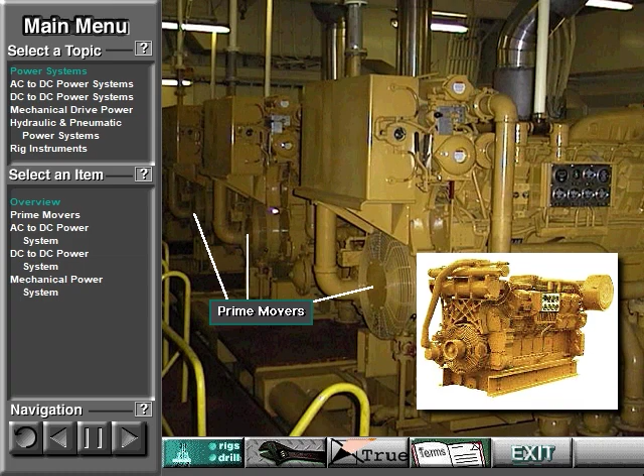At the heart of every rig power system, whether electrical or mechanical, is the prime mover. A prime mover is the rig's main source of power. Most rigs have more than one prime mover, and they are almost always large internal combustion engines. Some equipment on the rig requires hydraulic and pneumatic power, and the rig's hydraulic and pneumatic systems also obtain their power from one of the three basic distribution systems.

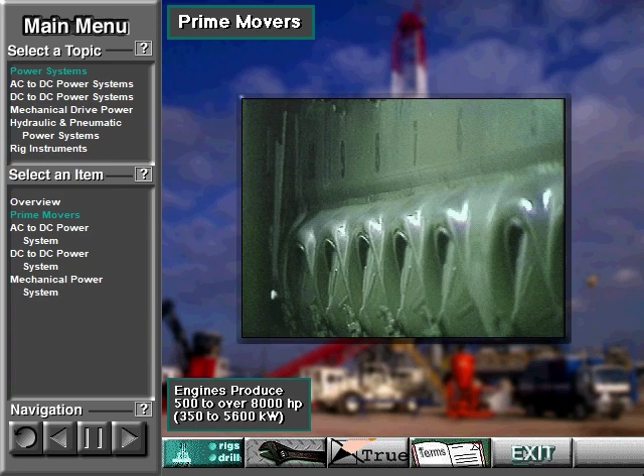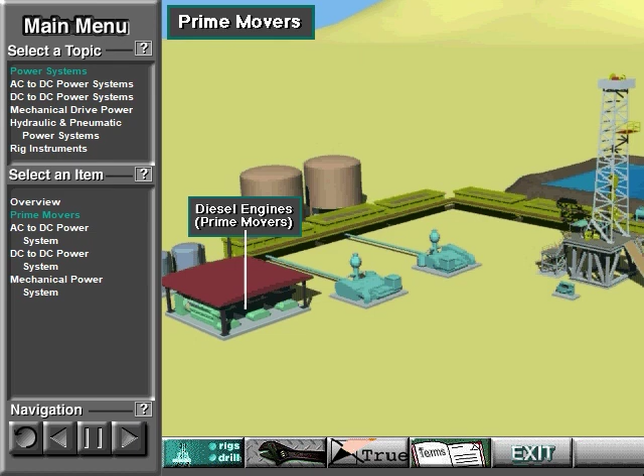Large diesel engines are the main power source, the prime movers for most rigs. These engines often produce from 500 to over 8,000 horsepower, or 350 to 5,600 kilowatts. Rig builders usually house several engines together to drive the rig equipment, and they also keep extra engine sets available for backup operations.

Most rig engines are diesel because, unlike gasoline engines, they can produce a lot of power when running slow. Also, diesel fuel is not as volatile as gasoline, so it's safer to use, transport, and store.

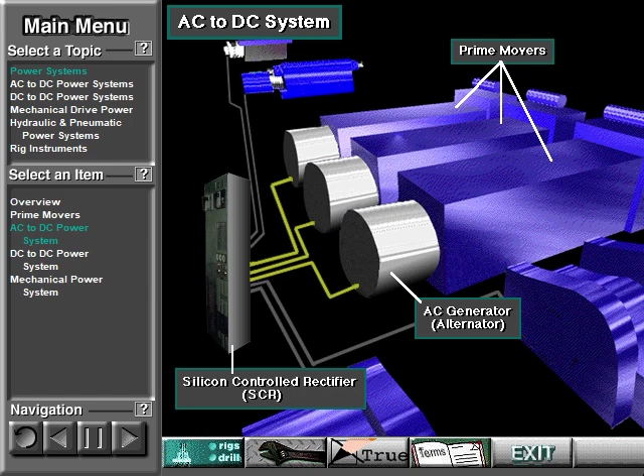Here's an AC to DC power system. The prime mover, usually a diesel engine, supplies power to the AC generator, also called an alternator. From the AC generator, AC current is sent to the SCR, the silicon-controlled rectifier. An SCR is a high-tech solid-state electronic device.

The SCR converts AC to DC current, which drives the heavy rig equipment, such as the mud pumps, the drawworks, and the rotary system. Auxiliary loads, such as small pumps and rig lighting, need lower voltage AC power, so a transformer steps down or reduces the voltage to the rig's auxiliary electric equipment.

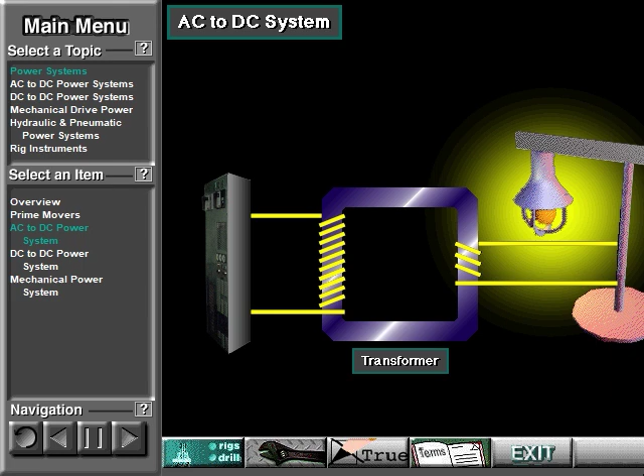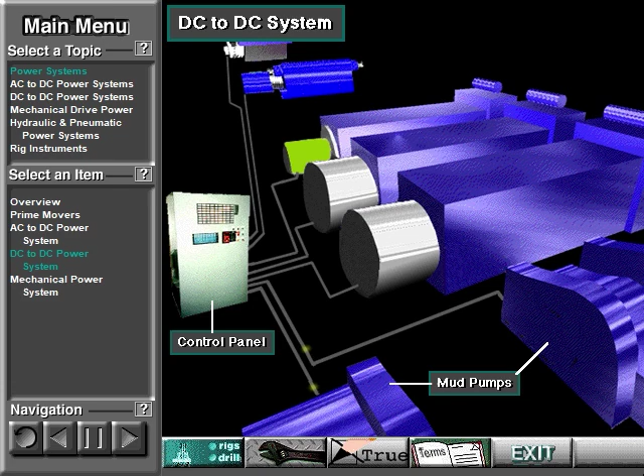Here's a DC to DC power system. The prime movers, usually diesel engines, power DC generators. From the generator, DC current goes through a control panel directly to DC motors. The DC motors power the mud pumps, the drawworks, and the rotary system.

A smaller AC generator is also part of the system. It supplies AC current for equipment that works best with this current type. For example, a chemical mixing pump requires AC power.

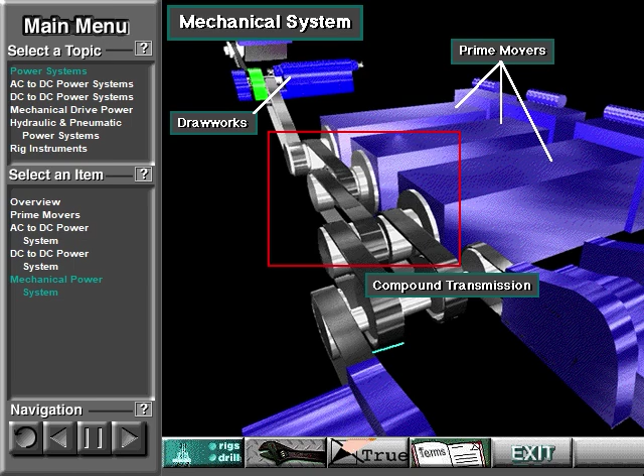Here's a mechanical rig system. Mechanically powered rigs are usually smaller than those rigs which use electric power. The prime mover drives a mechanical compound transmission, which in turn powers the drawworks, the rotary table, and the mud pumps.

Auxiliary loads, such as small motors, are supplied with AC from an alternator connected to the prime mover.

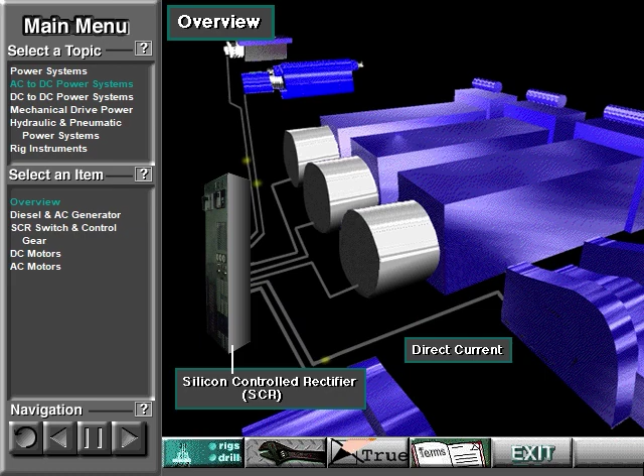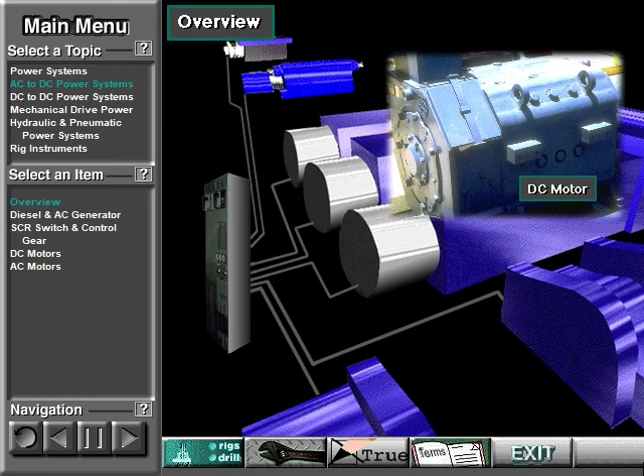Alternating current put out by the AC generators goes through heavy-duty electric cables to a special device called a silicon-controlled rectifier, or SCR. The SCR converts AC to DC. Other heavy-duty electric cables carry DC electricity to the DC motors. The DC motors convert electrical energy back into mechanical energy to drive the powerful hoisting, rotating, and circulating equipment.

Rig owners like to use AC generators because they can be built to be very powerful for their size, which is an advantage over DC generators. Also, rig equipment can distribute AC easier than DC. But direct current has certain advantages when driving large equipment. Mainly, DC motors produce a lot of torque at low speed that the drillers can easily control.

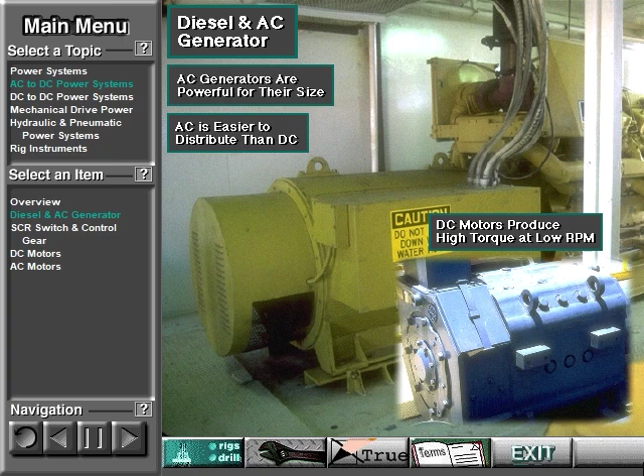Using remote switches on his console to control the SCR control panel, the driller can select and deliver the power from the various generators wherever it is required. But some AC generators power big motors. In fact, most of today's diesel-electric rigs use AC generators in a system called an SCR power system.

Here, a large AC generator, an alternator, is connected to the diesel engine prime mover. As the engine mechanically drives the AC generator, the generator produces alternating current, or AC electricity. AC is like the electricity used in most cities and homes.

Equipment in this electrical cabinet converts, or rectifies is the electrical term, most of the AC current produced by the AC generators into direct current. As mentioned before, rig owners usually prefer DC current for driving the very large equipment that requires precise variable speed control and high torque.

The control equipment includes solid-state electrical components called silicon-controlled rectifiers, or SCRs. Heavy-duty electrical cables come out of the cabinet and carry DC electricity to the powerful motors driving the circulating, hoisting, and rotating equipment.

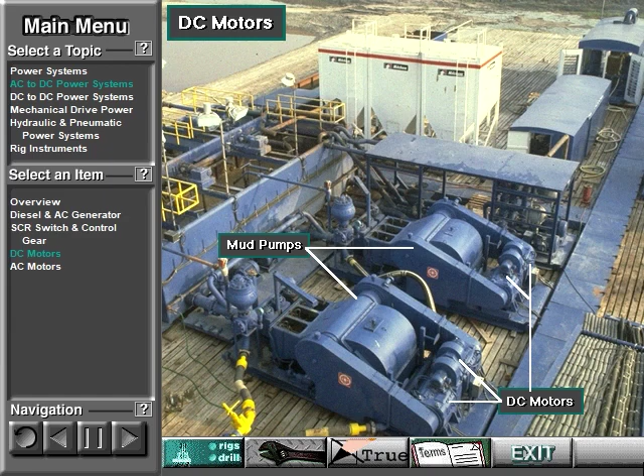Usually, large DC motors supply power to the mud pumps, the drawworks, and the rotary table or top drive. Sometimes, the drawworks mechanically drives the rotary table, but on some rigs, the rotary table has its own motor.

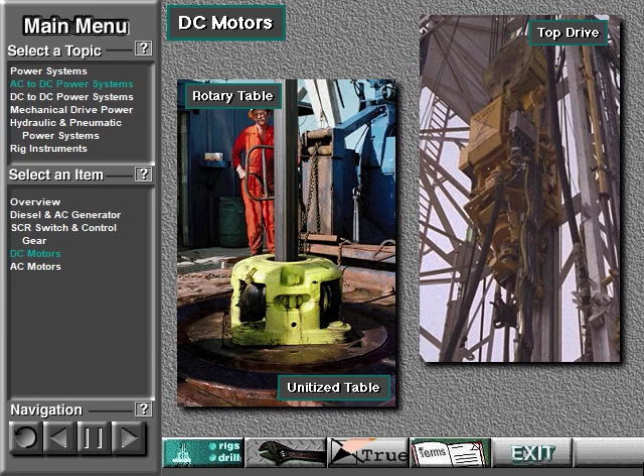The driller can control the speed of a DC motor very accurately, which is why rig owners use DC instead of AC motors. With accurate speed control, the driller can accurately set the speed the drawworks lifts, the mud pump operates, and the rotary table turns on rigs without a top drive.

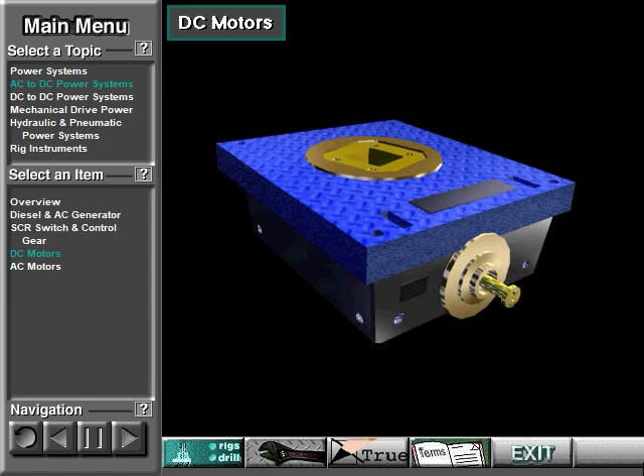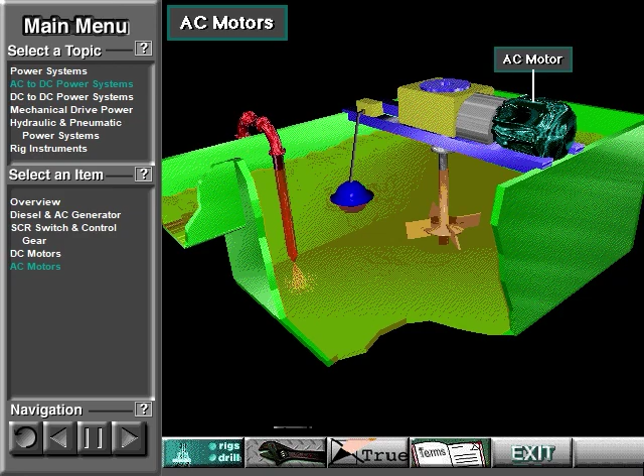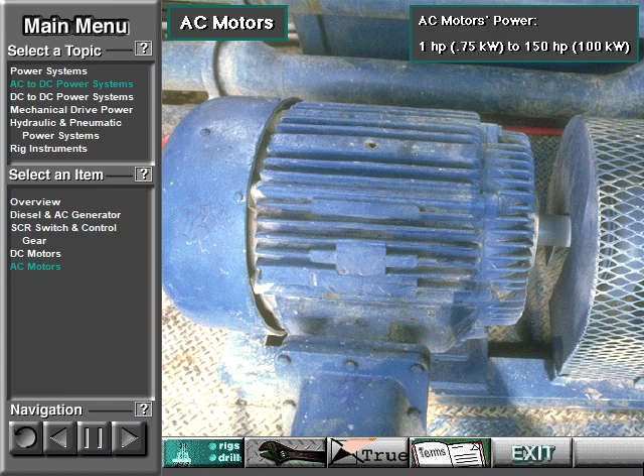Here's another AC motor. It powers the paddles on the mud agitator in a mixing tank. AC motors generally power equipment that does not require a lot of horsepower, so they vary in power from less than 1 horsepower, or 0.75 kilowatts, to more than 150 horsepower, 100 kilowatts.

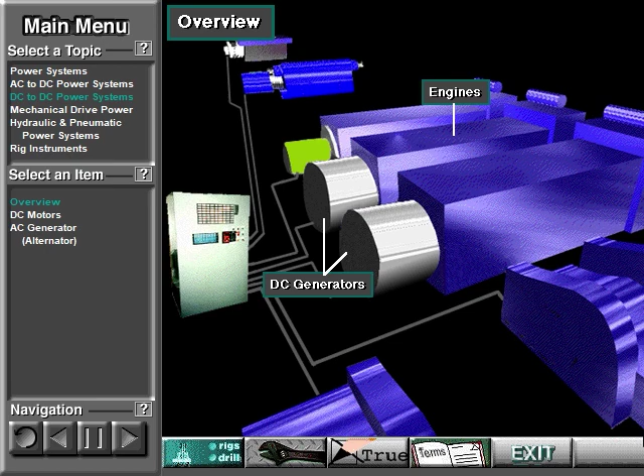For electric power distribution, some rigs use DC to DC power. DC to DC was the first electric power system. In a DC to DC system, each engine drives a DC generator, which converts the rotating mechanical energy of the diesel engine into DC electricity.

Heavy-duty electrical cables carry DC electricity via the control panel to large 1,000 horsepower or 700 kilowatt DC motors. The motors convert the electricity back into mechanical energy, which powers the hoisting, rotating, and circulating equipment.

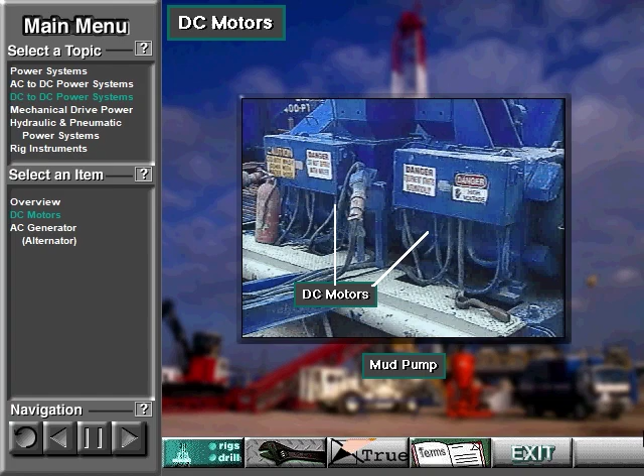For large equipment, most rig owners prefer DC motors over AC motors. DC motors put out high torque, twisting force, at low speed. Further, the driller can easily control the torque from his console on the rig floor. Keep in mind, though, that recent technological advances are allowing computerized controls and variable speed AC motor drives to be used where only DC motors were used in the past.

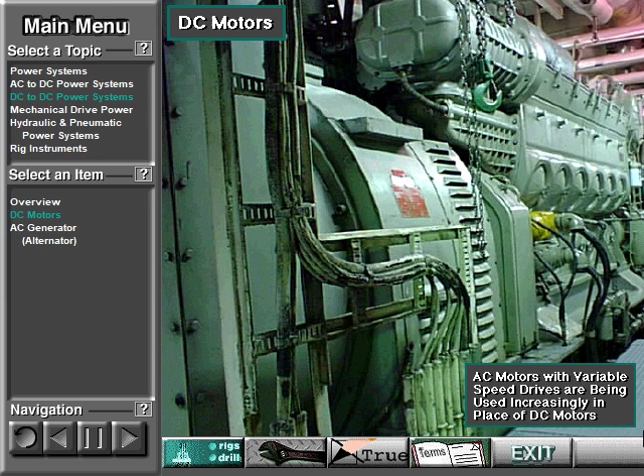This is a generator, or alternator, on a DC to DC rig. It generates the AC electricity that DC to DC rigs need. The alternator powers smaller equipment on the DC to DC rig, like the small AC motors on centrifugal pumps, air conditioners, lights, fans, water maker units, and other small equipment.

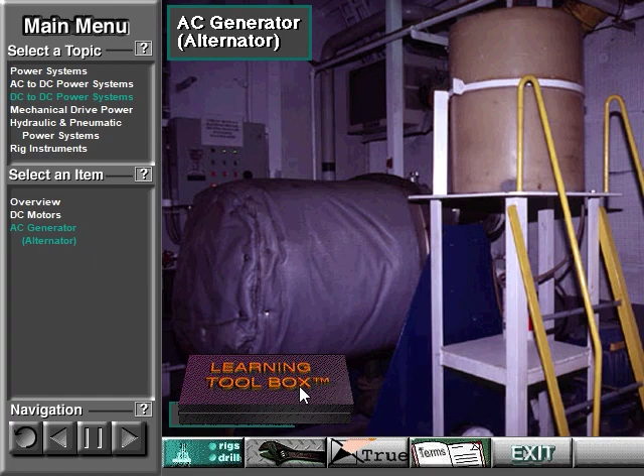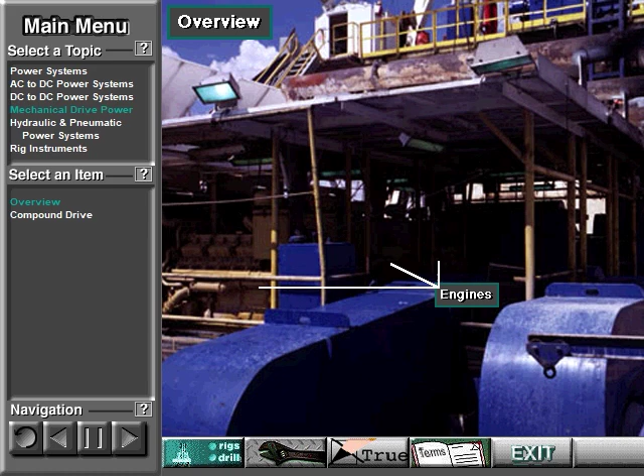Mechanical drive rigs normally compound, or connect, two or more engines to drive the main pumping, rotating, and hoisting equipment. Generally, small to medium-sized land rigs use mechanical drives.

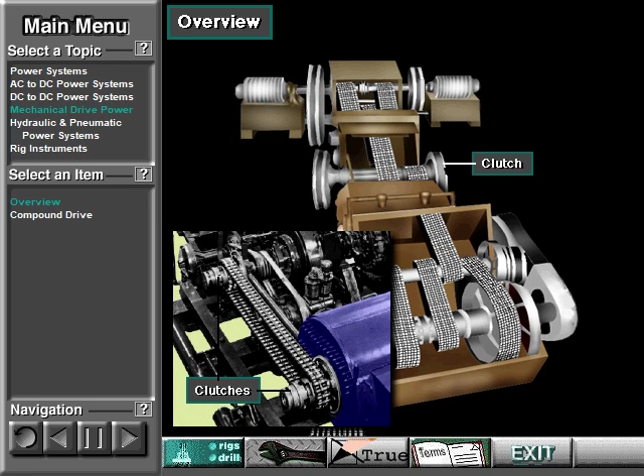They use clutches, converters, chains, shafts, belts, or compounding transmissions to connect the prime movers to the driven equipment.

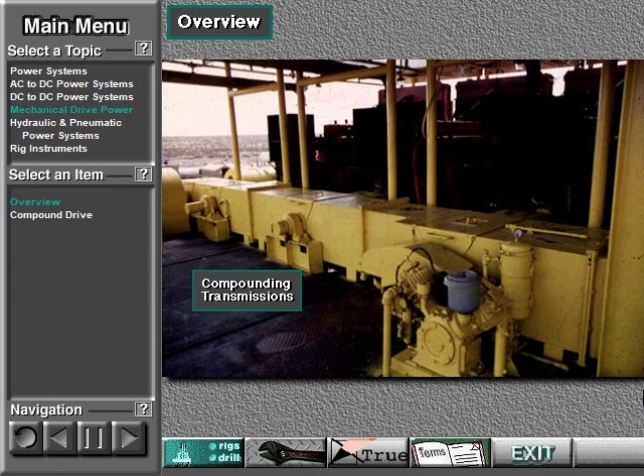Here's a common way to get power to the components on a mechanical drive rig. This shows 3 engines that the rig owner compounded. That is, the power from each engine goes through a series of sprockets and chains in a housing, called a compound.

The compound transfers engine power to the drawworks, the rotary table, and the mud pumps.

You've probably noticed that the engines and motors are commonly rated according to the amount of power they produce, in horsepower or kilowatts. Power is the amount of work performed over a period of time.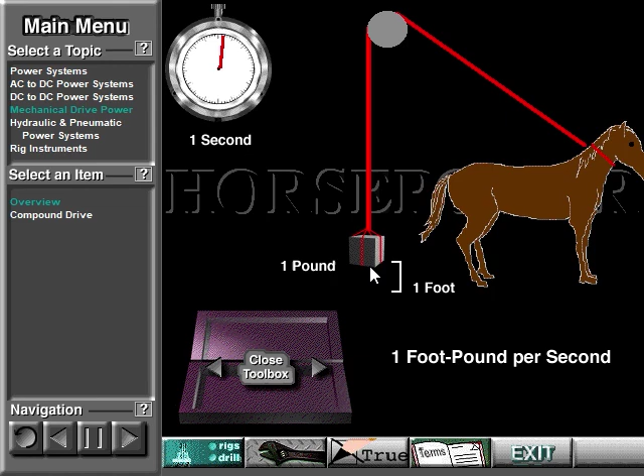One horsepower is equal to 550 foot-pounds per second. So 1 horsepower is the amount of power that would lift 550 pounds, 1 foot off the ground, in 1 second. Click on the weight.

In the metric system of measurements, power is often measured in joules per second. A joule is equivalent to 1 Newton meter. 1 joule per second is the amount of power that would lift a 0.102 kilogram object 1 meter off the ground in 1 second. Click on the weight with your mouse to lift it.

One horsepower is equal to 746 joules per second. So 1 horsepower is the amount of power that would lift a 76.1 kilogram object 1 meter off the ground in 1 second. Click on the weight.

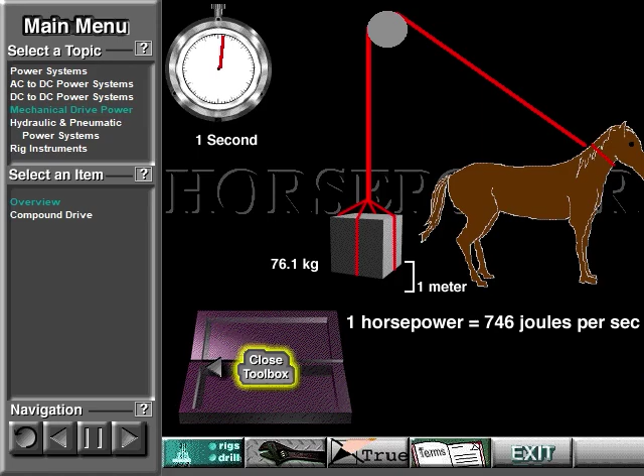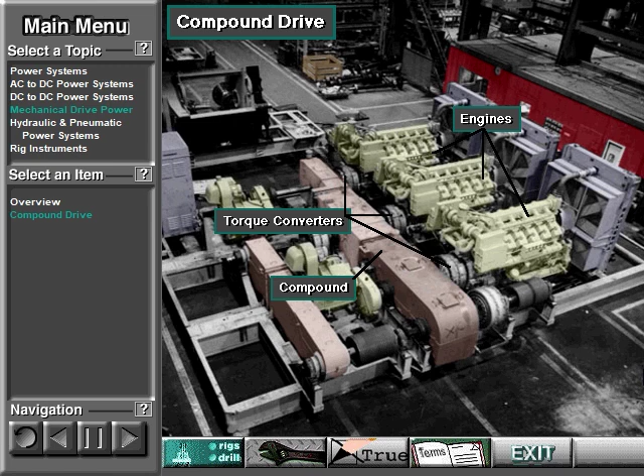In a compound drive, engine power usually goes through torque converters to the sprockets and chains. Steel guards cover the sprockets and chains, removed here so you can see them. Torque converters smoothly transfer engine power to the compound.

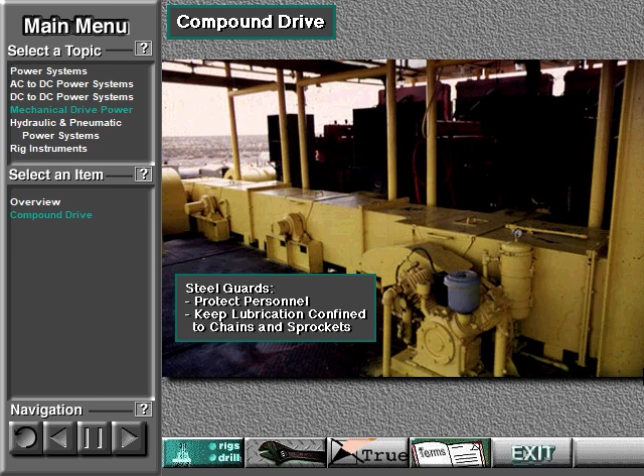Here, you can see the steel guards covering the machinery in the compound. Not only do the guards protect personnel, they also keep a lubricating oil spray confined to the chains and sprockets. Also, note that large V-belts, called power bands, drive the mud pumps. Steel shrouds also guard them.

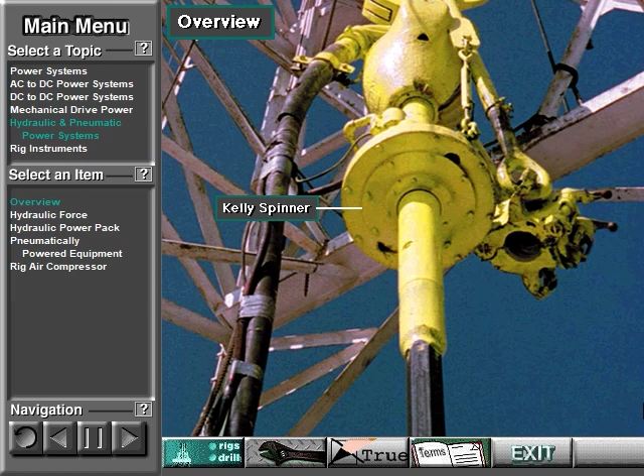Many tools use hydraulics to transmit power. Examples include the Kelly spinner, the iron roughneck, and casing tongs.

Hydraulics is a means of transmitting power by pushing on a confined liquid. Here's a piston moving inside a cylinder. Hydraulic fluid fills the cylinder to the left of the piston. The piston's surface area is 10 square inches. If a pump puts 1,000 pounds per square inch, or psi, of hydraulic fluid pressure on one side of the piston, this 1,000 psi acts on the 10 square inch piston to produce 10,000 pounds of force. That's a lot of force available for powering certain tools and equipment.

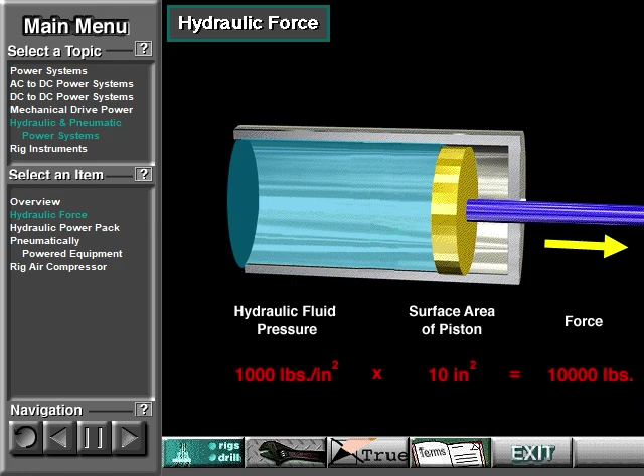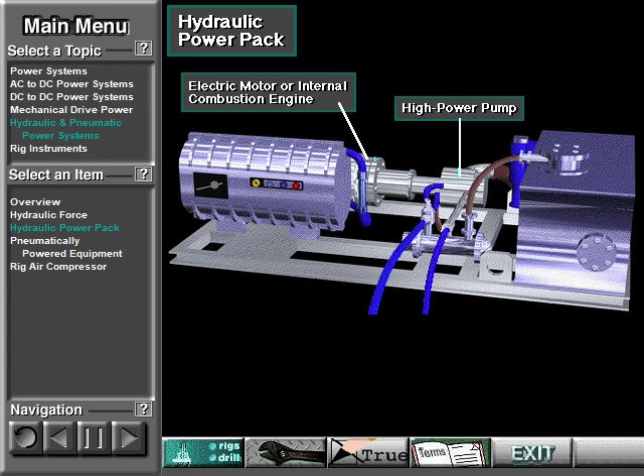Here's a typical hydraulic power pack used on many rigs. It has an electrical motor or an internal combustion engine to power the high-power pump.

The pump takes hydraulic fluid from the reservoir and sends it out a high-strength steel-reinforced hose to the devices needing hydraulic power. The fluid returns to the reservoir after it passes through the Kelly spinner or other tool. The hydraulic power pack is a closed system; the fluid is used over and over.

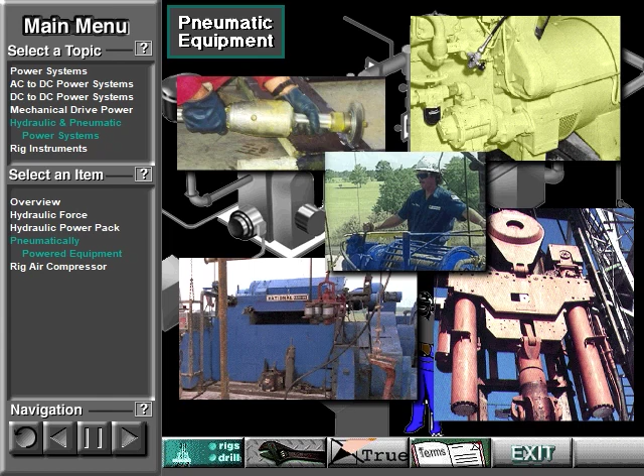Certain controls, valves, and tools on the rig are air or pneumatically operated. For instance, the driller uses pneumatic controls on the driller's console to engage and disengage clutches on equipment like the drawworks. The rig crew may use air-powered hand tools, like a grinder. They also use an air hoist, an air-powered winch, to hoist and move relatively light equipment onto and around the rig floor.

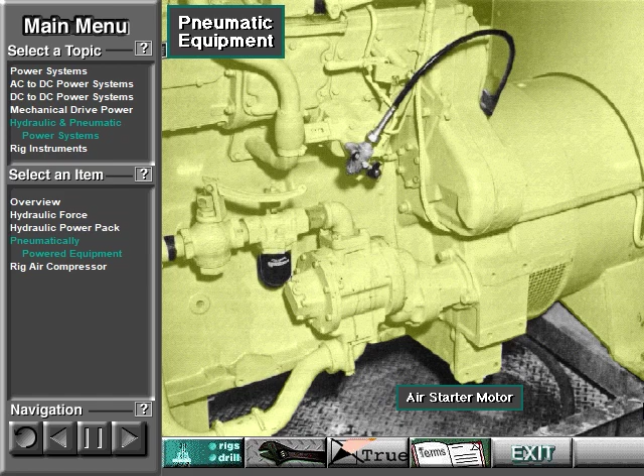Many diesel engines on rigs have an air starter, which is an air-operated motor that turns the engine crankshaft over to start it. Finally, a floating rig's motion compensator operates on large amounts of compressed air to compensate for vessel heave while keeping the drill string in position.

Which of the rig types use a motion compensator? Select the correct answer or answers and then press Accept.

Good try, but the correct answer is semi-submersible and drill ship.

An air compression system provides air pressure to operate the pneumatic controls, valves, and tools on the rig. Rigs use rotary screw compressors or reciprocating compressors to compress air. A typical reciprocating air compressor has 2, 3, or 4 pistons moving inside cylinders.

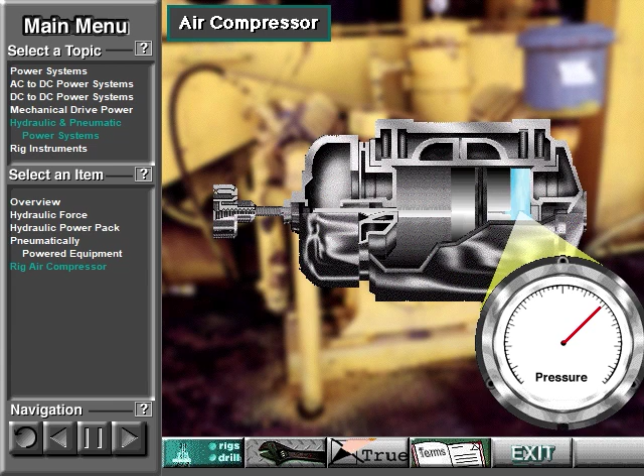The compressor takes in air from the atmosphere and raises its pressure, that is, compresses it. The volume tank stores a given amount or volume of compressed air that is ready for use when needed.

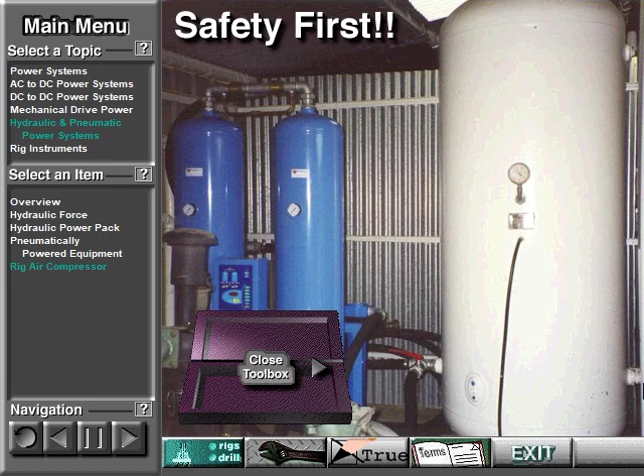Air compressed to 100 pounds per square inch, or 690 kilopascals, can be dangerous. Care must be taken when working on or around air systems. Always wear proper safety equipment such as a hard hat, eye and ear protection, work clothes, and work boots. Never attempt to open a component of an air system or a section of pipe without making sure that all of the air has been bled out first.

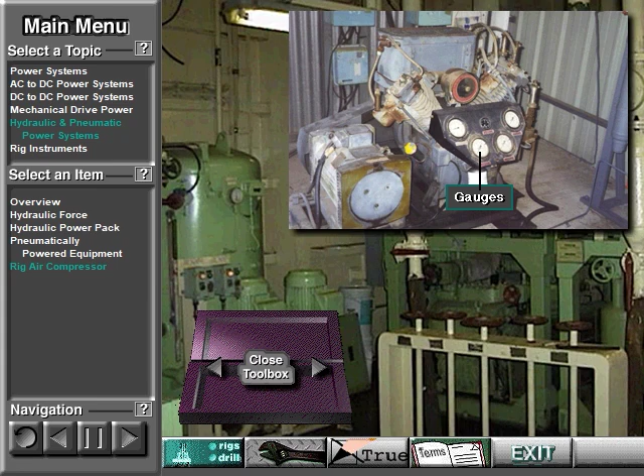Periodically check pressure and temperature gauges to be sure they are at the proper level. Also, inspect pipes and vessels for corrosion. And beware, if there's a fire on the rig, any break in the air system instantly adds oxygen from the air to fan the flames.

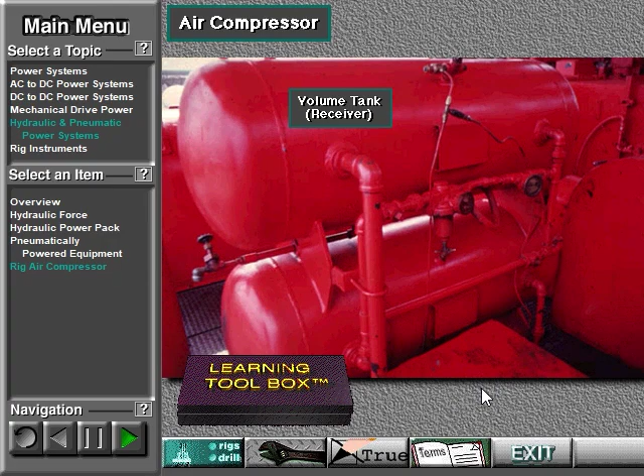A drilling rig has many instruments and gauges. They help the driller and other crew members keep track of the drilling operation. Rig instruments vary from the most basic to sophisticated computers with video displays. Here, we'll cover the basics.

The driller's console is the driller's workstation on the rig floor. It has several instruments and gauges. All of them help drillers track the drilling process and keep them informed of the situation.

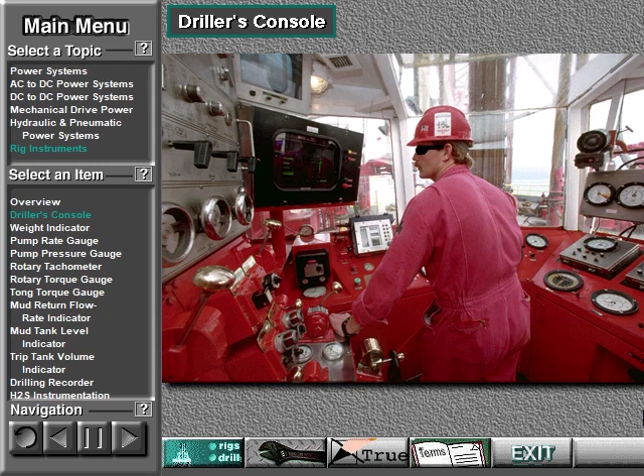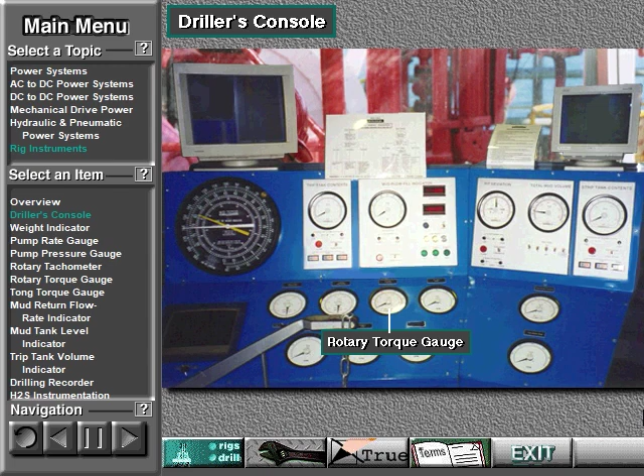Indicators and gauges on the driller's console include the weight indicator, the pump rate indicator, mud pump pressure gauge, rotary tachometer, rotary torque gauge, tong torque gauge, mud return mud flow rate indicator, mud tank level indicator, and trip tank volume indicator.

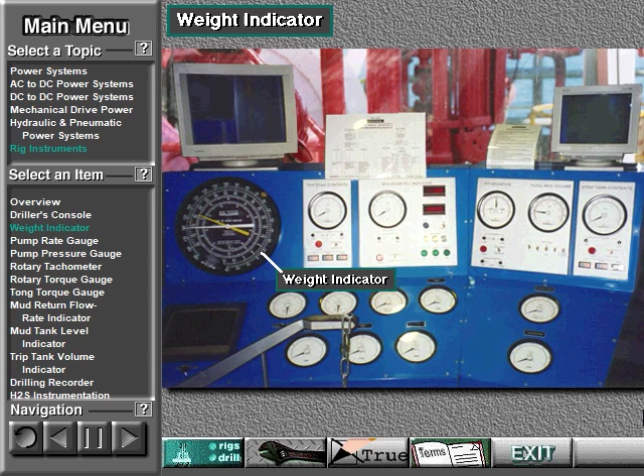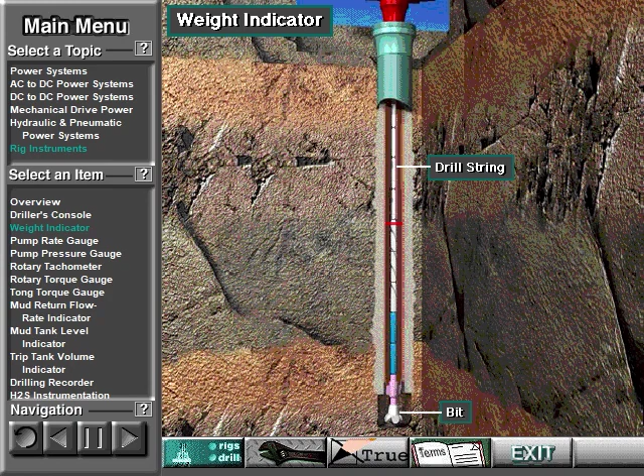The weight indicator is the largest gauge on the driller's panel. It indicates the hook load and weight on the bit. The hook load is the total amount of weight hanging from the hook. Weight on the bit, or WOB, is the amount of weight put on the bit by the drill string. It is less than the hook load.

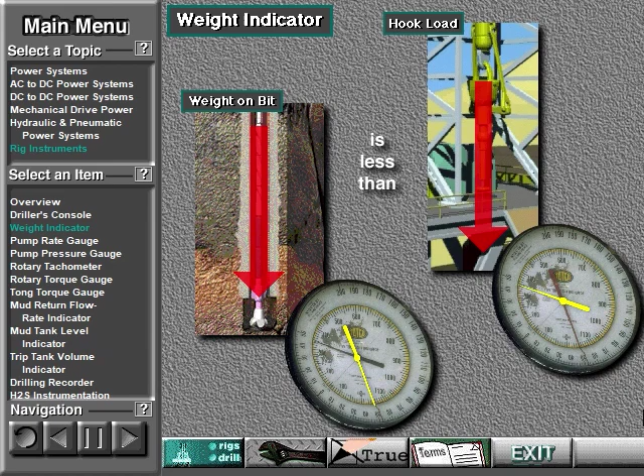The weight indicator is extremely sensitive to hook load changes. Drillers can use hook load changes to monitor the amount of drag or friction the well bore puts on the drill string when they move the pipe up or down. Or, because it is so precise, the driller can use it to monitor the operation of downhole tools, requiring small variations in weight.

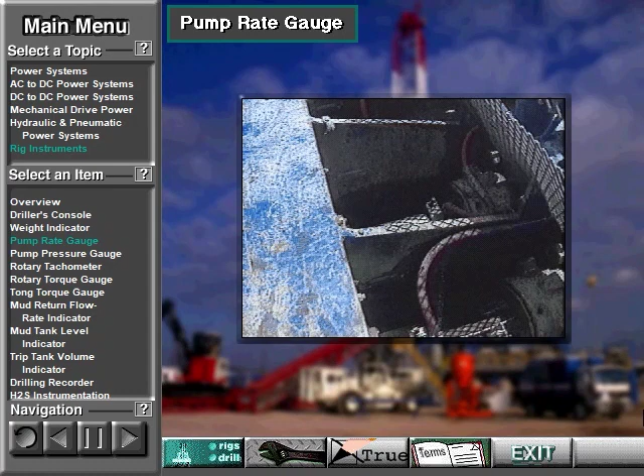The pump rate gauge shows the number of times one mud pump piston moves per minute. This console has two pump rate gauges because the rig has two mud pumps. The driller can determine the total volume of mud being pumped by multiplying the pump rate by the number of pistons in the pump times the amount of mud each piston pumps.

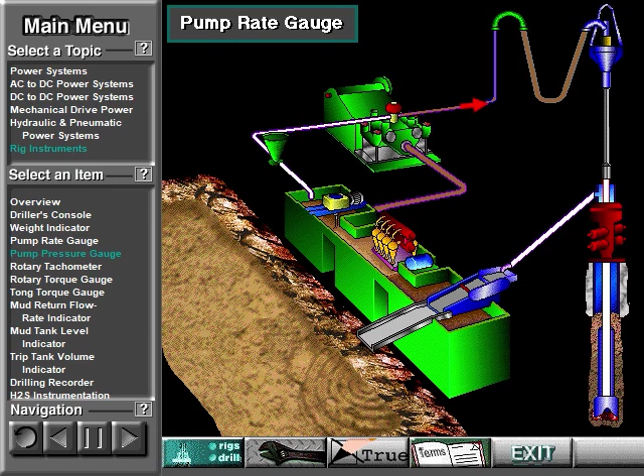The mud pump pressure gauge shows drillers the amount of pressure the pump is putting out. They monitor pump pressure from the standpipe to ensure that it is the correct amount needed to keep the hole clean and return cuttings back to the surface.

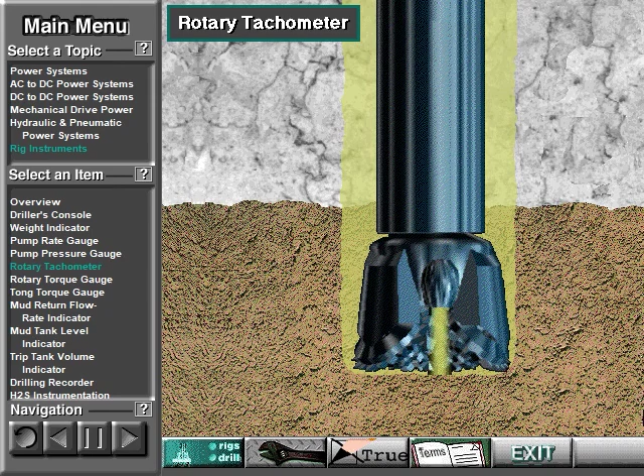The rotary tachometer shows the revolutions per minute, or RPM, of the rotary table or top drive unit. Drillers monitor rotary RPM because they need to know the rate the bit is turning. Different bits rotate at different RPMs. RPM ranges for a bit are specified by the manufacturer.

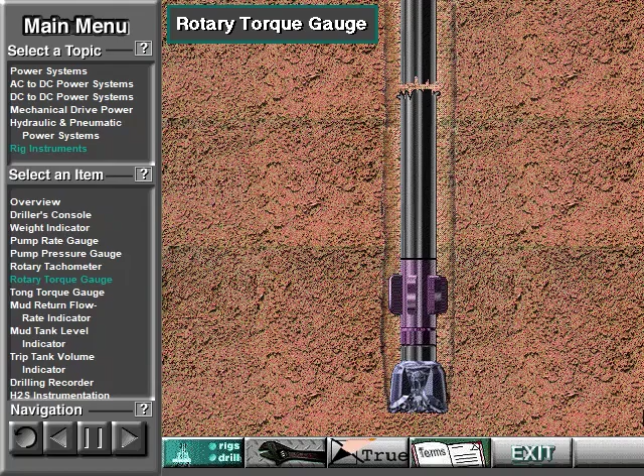Drillers use the rotary torque gauge to see how much twisting force, or torque, the rotary is applying to the drill string. Knowing rotary torque helps keep drillers from parting the drill string because of too much rotary torque. Parting the drill string in this manner is called twisting off.

A tong torque gauge helps the driller and the rotary helpers make up the drill pipe and drill collars with the right amount of torque. Too little torque, or tightness in the connection, may leak or unscrew while drilling. Too much torque can damage or gall threads, which cause them to leak and eventually to come apart.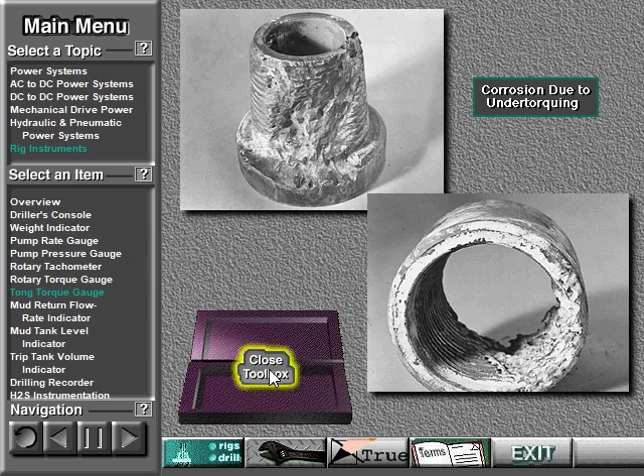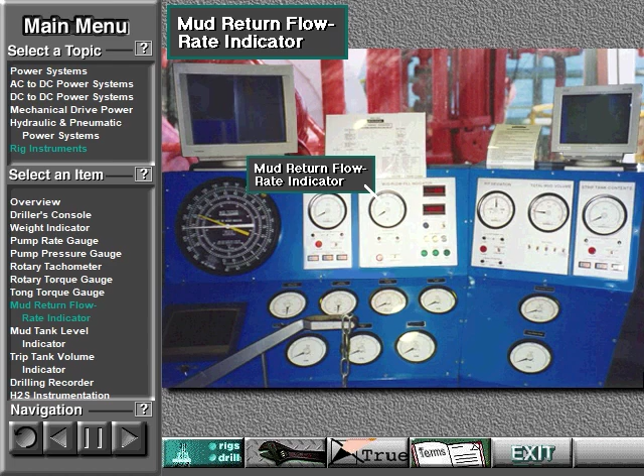Drillers use the mud return flow rate gauge as a relative indicator of how much drilling fluid is returning at the flow line. The sensor is mounted in the mud return line, the flow line.

A paddle inside the return line moves as mud flows past it. As the paddle moves, it sends a signal to a readout panel mounted in the driller's control console. The driller sets the readout so that as long as return flow is normal with constant pump speed and output, no alarm sounds or lights up. However, when the return flow rate changes, increases or decreases, the paddle's motion also changes, sending a signal to the driller's readout and sounding or illuminating an alarm.

A change in the return flow rate of the mud may indicate one of two things. If the flow rate decreases, mud may be being lost to a downhole formation. If the flow rate increases, formation fluids may have entered the hole and are forcing drilling mud out. So a mud return flow rate indicator can help drillers detect kicks and loss of circulation.

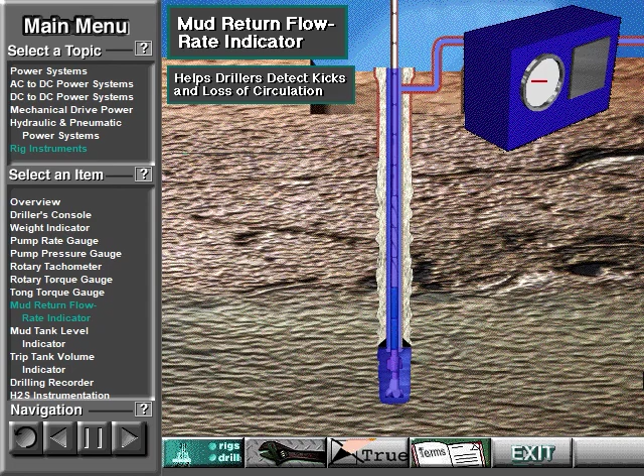This panel takes the tank level signals from all the floats in the tanks, totals them, and sends the information to the chart recorder next to the panel on the rig floor close to the driller's console.

If the level of mud in the tanks falls and no one has removed mud from the tanks, then it is likely that mud is being lost to a downhole formation. If the level of mud in the tanks rises and no one has added mud to the system, then it's likely that formation fluids are flowing into the well. Thus, a mud tank level indicator is another tool to help the driller detect kicks and loss of circulation.

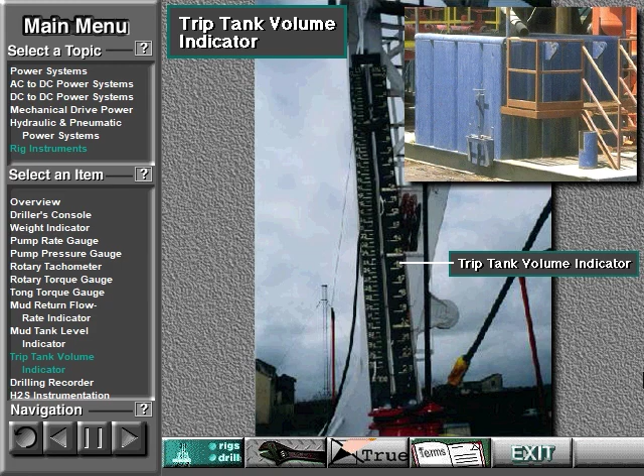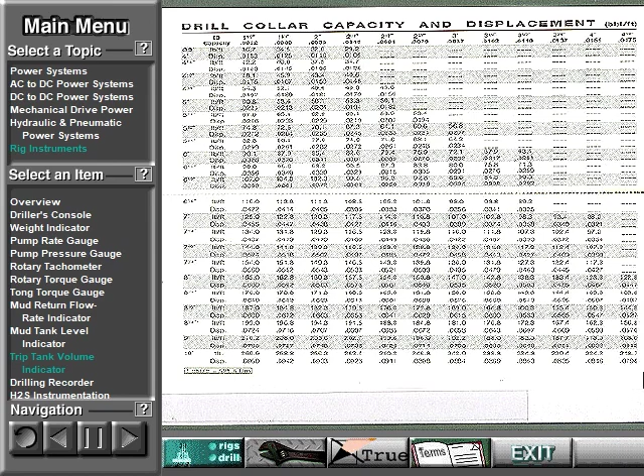A trip tank volume indicator helps the driller monitor the amount of mud being displaced by the tubulars or wire rope being run in and pulled out of the hole. Crew members calculate tubular displacement before each trip using tables from a handbook. Then, during a trip, they compare the calculated volumes to the actual displacement. Close monitoring of the trip tank during trips is crucial to proper well control.

A drilling recorder makes a record of drilling variables, such as the hook load, weight on bit, rate of penetration, torque, pump strokes, and pump pressure during drilling.

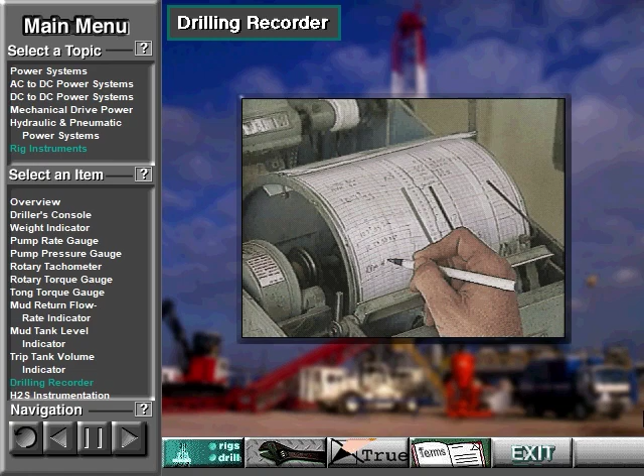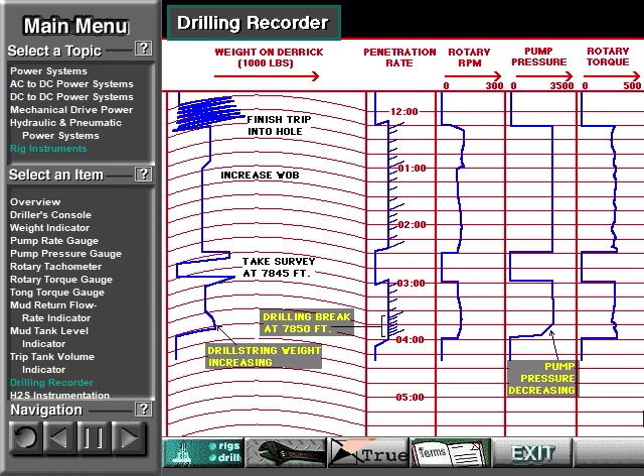It's usually located in the doghouse on the rig floor. The driller puts a chart onto the revolving drum. Several pens with ink in them trace records onto the chart. Drilling recorders may have from one to several pens, depending on how they're hooked up. The recorder gets signals from sensors mounted near the gauges that measure the drilling variables. For instance, a load cell on the deadline anchor senses hook load and weight on bit.

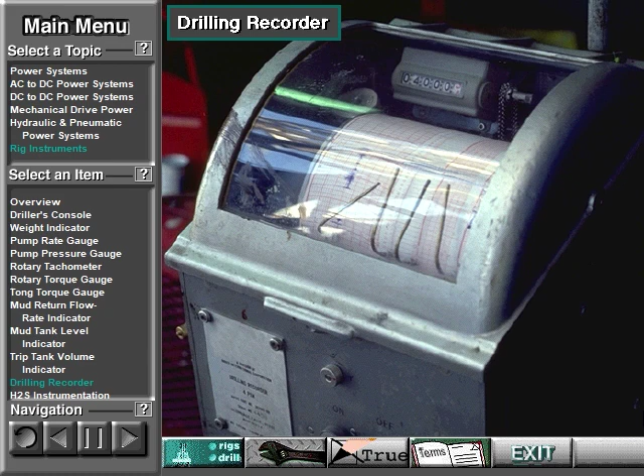Here's a photo of a drilling recorder. Note that it has a hinged plexiglass cover that drillers can raise to change the chart when necessary.

Hydrogen sulfide, H2S or sour gas, is the most poisonous gas encountered in drilling operations. It occurs worldwide in various concentrations associated with gas, oil, and water produced from wells. It is extremely toxic, explosive, and heavier than air. It is also colorless, so you cannot see it. In low concentrations, it smells like rotten eggs. But you cannot depend on your sense of smell to escape harm. H2S quickly deadens your ability to smell.

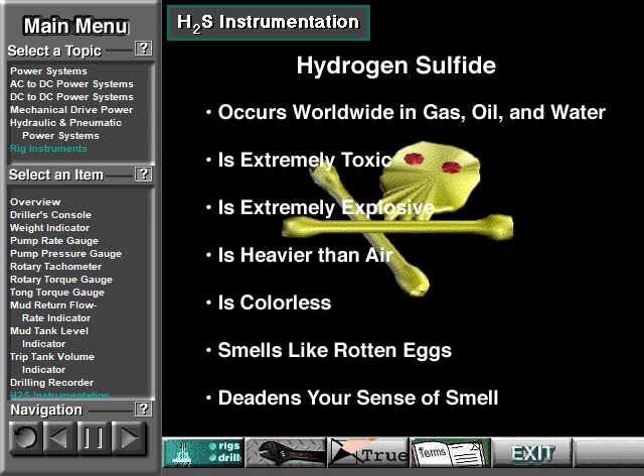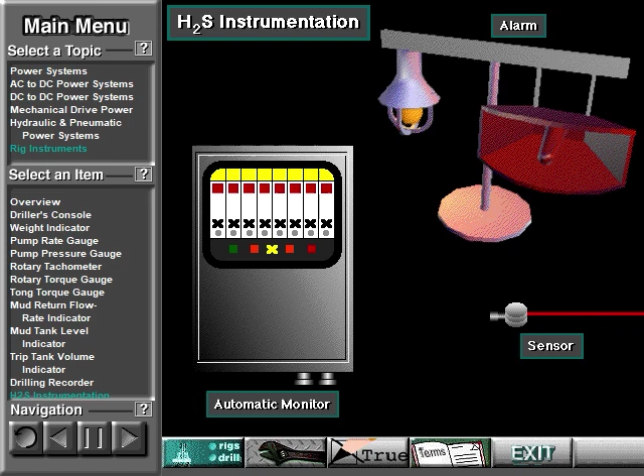Where H2S may be present, rigs are equipped with sensors, automatic monitors, and alarms. This is an audible and visual H2S alarm. The horn sounds a siren, while the light flashes brightly if they're activated by H2S sensors placed on the rig.

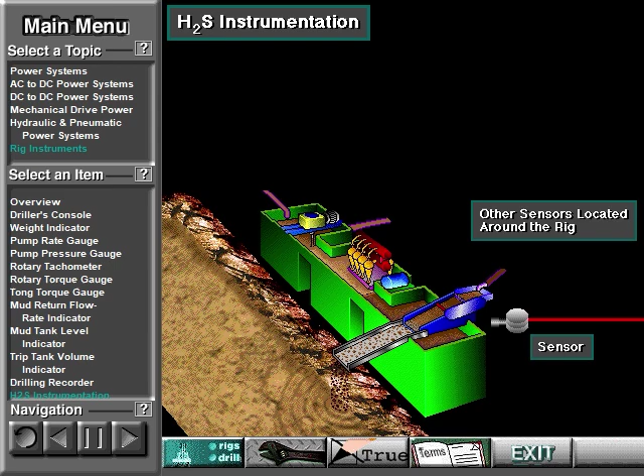This H2S sensor is placed near the mud tanks. Others may be at the bell nipple on the rig floor, shale shakers, flow line, rig accommodations air intake, and other places on the rig. When a sensor picks up H2S gas above a predetermined level, the monitor triggers both the visual and audible alarms. Upon hearing or seeing the alarm, crew members can take action to avoid injury or death. You will receive detailed H2S training if your rig is working in an area where H2S may be encountered.